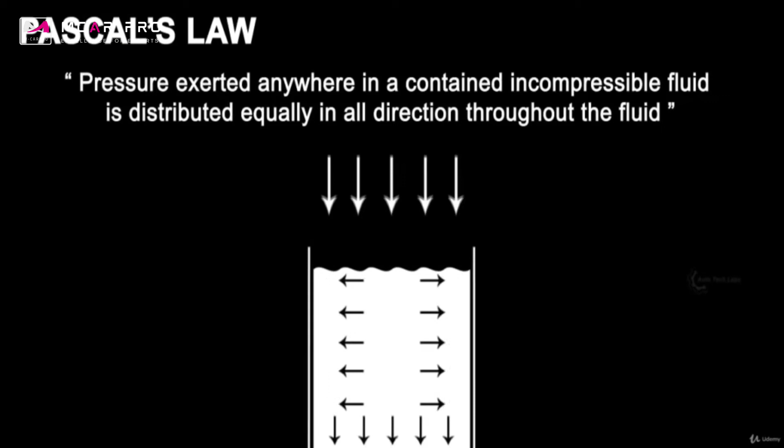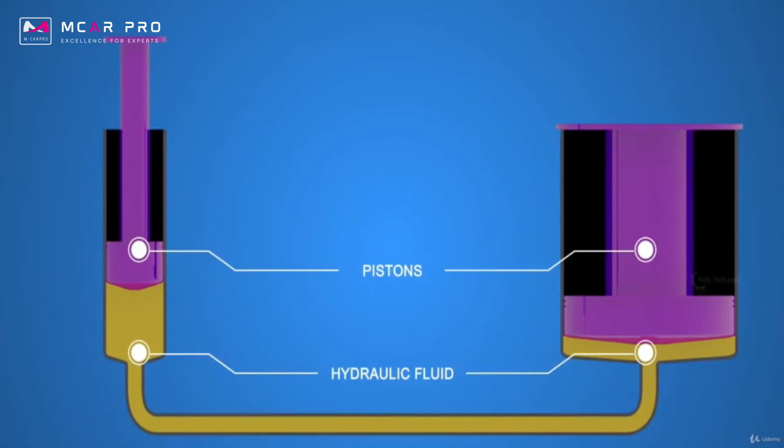Let's make it simple. Consider two cylinders with pistons connected to each other, filled with incompressible fluid. The mathematical relation is as follows.

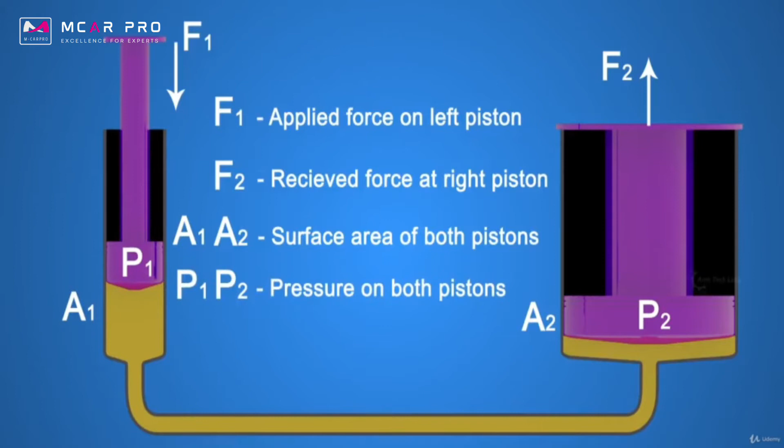Pressure can be stated as force experienced per area. According to Pascal's law, pressure on both pistons are equal, which gives us P1 equals P2.

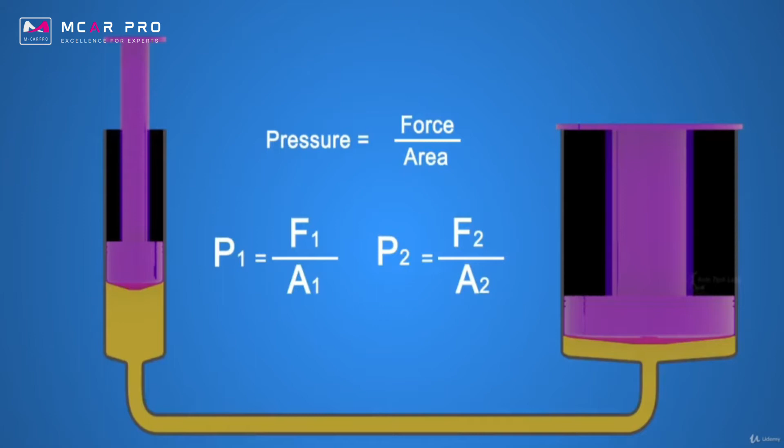So when force is applied to the left piston, the fluid will transmit the force to the right piston surface. But it will be a factor of the ratio of the two piston surfaces. This concludes that a small force F1 at the left piston will give a higher force F2 at the right piston, provided A2 is greater than A1.

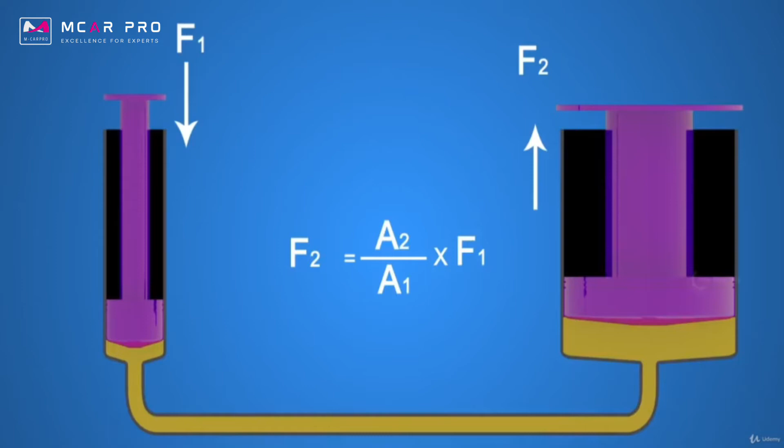With this, the left piston can act as the pedal side and the right piston can act as the wheel side, transferring energy from pedal to the brakes.

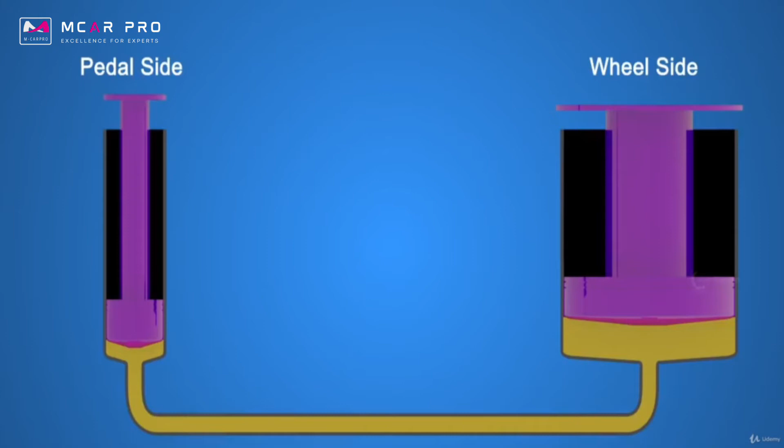Now we know the theory. Let's see how it works in real. Let's see the exploded view of a car wheel and the parts involved.

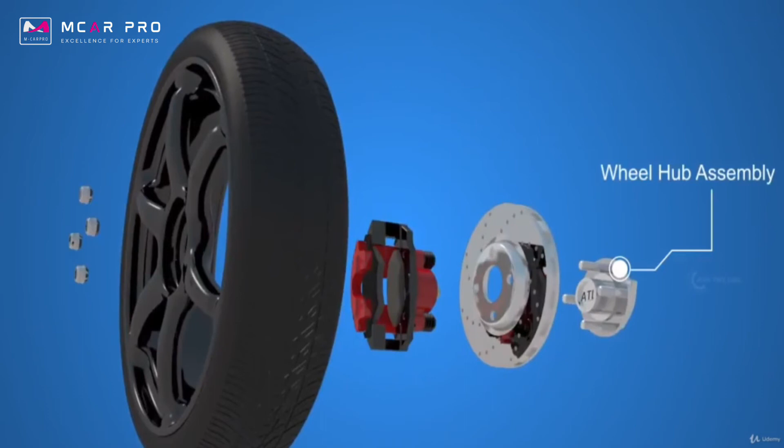The wheel hub assembly holds the wheel and the disc rotor, and bearings inside it allow their smooth rotation.

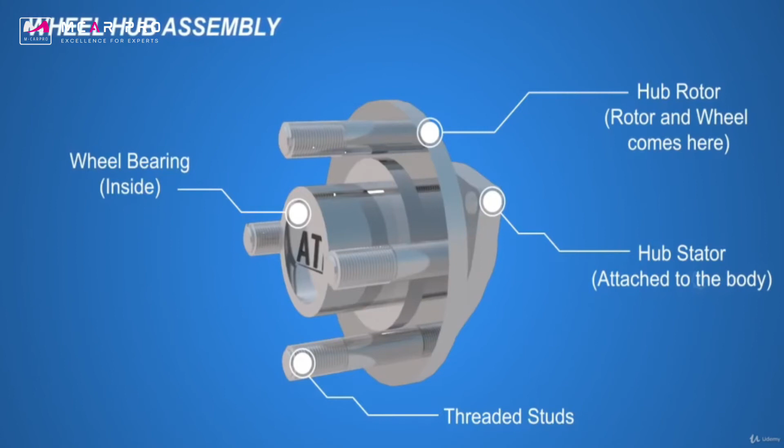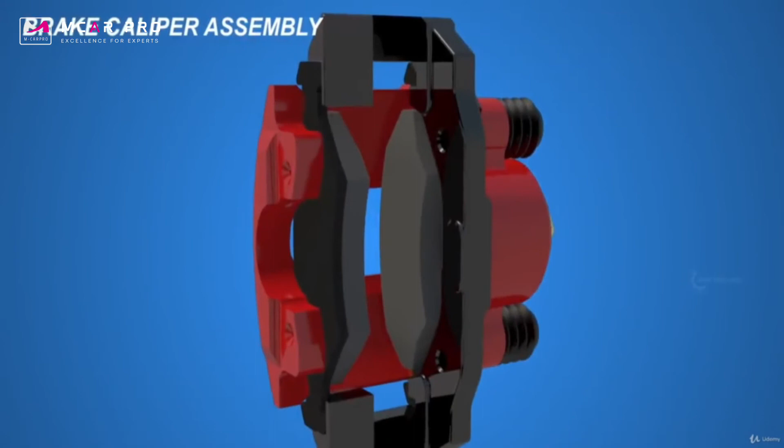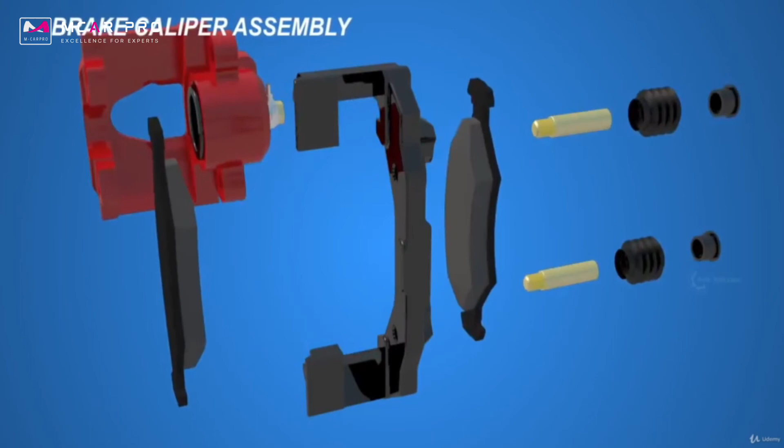The brake caliper assembly uses the hydraulic force from the brake pedal to squeeze the brake pads to the rotor surfaces, creating friction and decelerating the wheel. The caliper assembly consists of the caliper bracket, slider pins, dust boots, inner brake pad and outer brake pad, and caliper frame and piston.

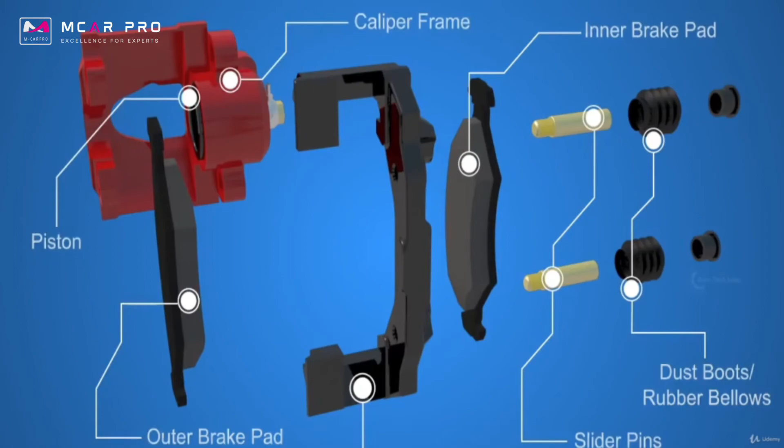The caliper frame has a banjo fitting through which the fluid will reach the piston. The pressurized fluid from the pedal side is capable of pushing the piston with great force. Also, the caliper frame is free to slide along the slider pins within a fixed extent.

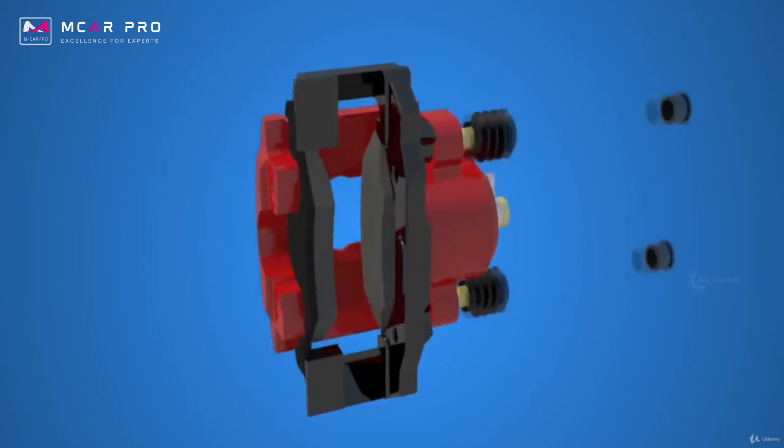Now we know the parts. Let's see how it works.

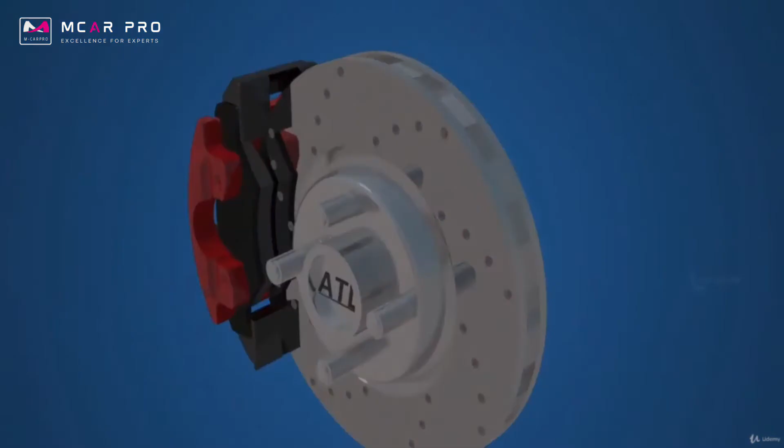When you apply the brake, the caliper will receive the high-pressure hydraulic fluid from the brake master cylinder. The fluid will push the piston, which makes the inner brake pad squeeze against the disc rotor surface.

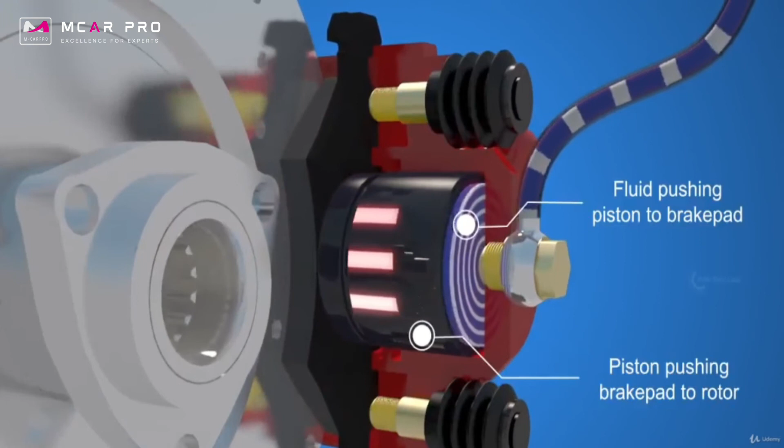As a result, the fluid's backward force will push the caliper frame along the slide pin, which makes the outer brake pad squeeze against the other side of the disc rotor.

Let's see one more time from the top view. Fluid pushes piston, piston pushes brake pad, and creates friction.

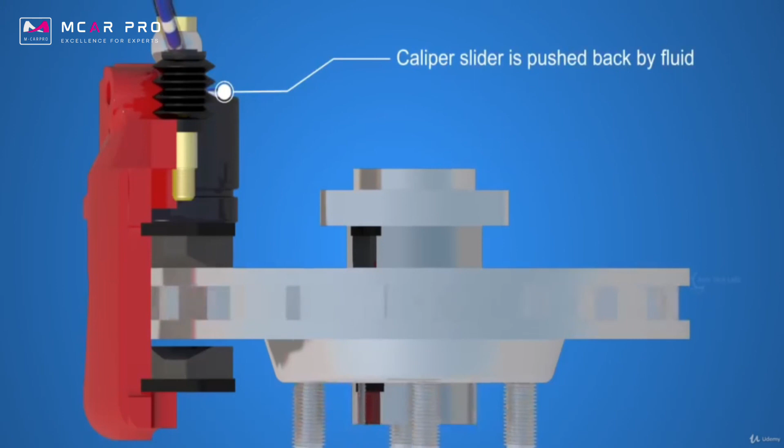Once the inner brake pad is pushed against the rotor, the fluid will push the caliper frame. The outer brake pad will now be pulled towards the other side of the disc rotor. This is how the disc brake system works on a wheel side.